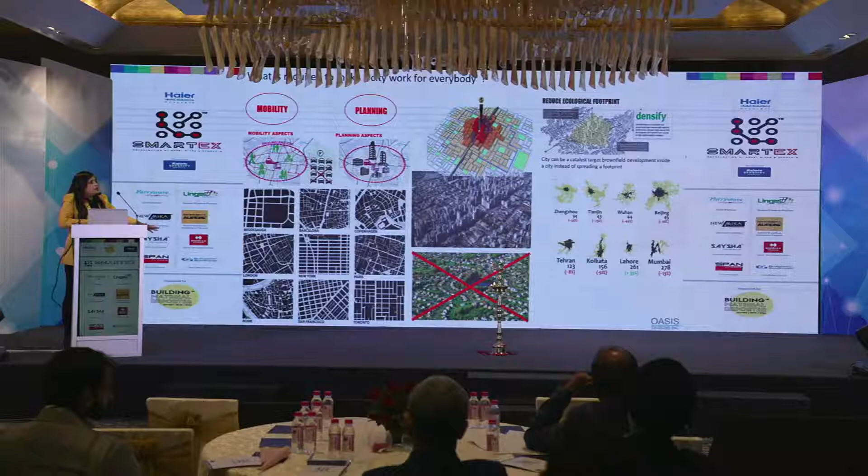Now typically, the really successful cities have been growing over a period of time, either horizontally or vertically, but in India, mostly horizontally, and not even optimizing for transit. Rather, if there is one magnetic city, then everything just follows its footprint.

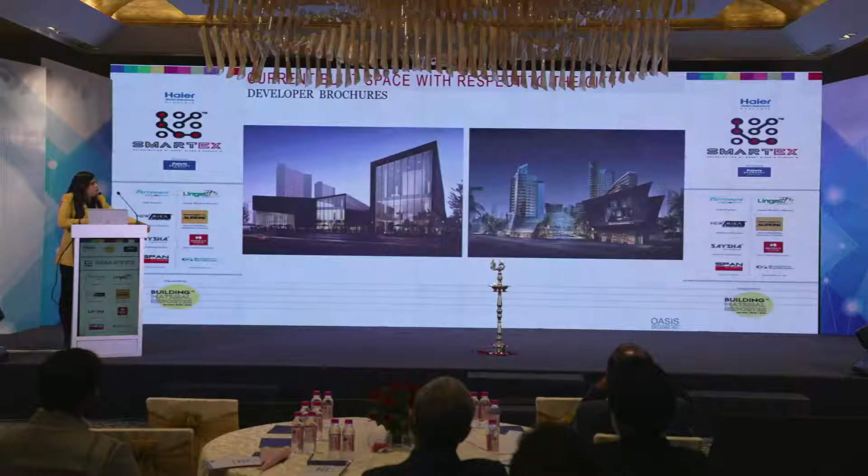Now, if we look at where architecture happens, the developer segment, and where the actual buildings come in, there are beautiful brochures printed, but we don't see any people or whatever is outside. These beautiful buildings have not really related themselves to the city.

So they are separate entities to the real city that is happening, and the real city is also not relating to transit, of the hub, which is a walkable place, but it's surrounded. So it's really sad that we are making walkable places, but we are not relating it to the city.

Similarly, for smaller plots also, our bylaws and policies always get guided by certain things, and this is something to be looked at.

Another thing is that we don't understand what is private and what is public. Place happens when we see the city from the lens of parking. This was a picture near the NDMC area, where land is given for parking.

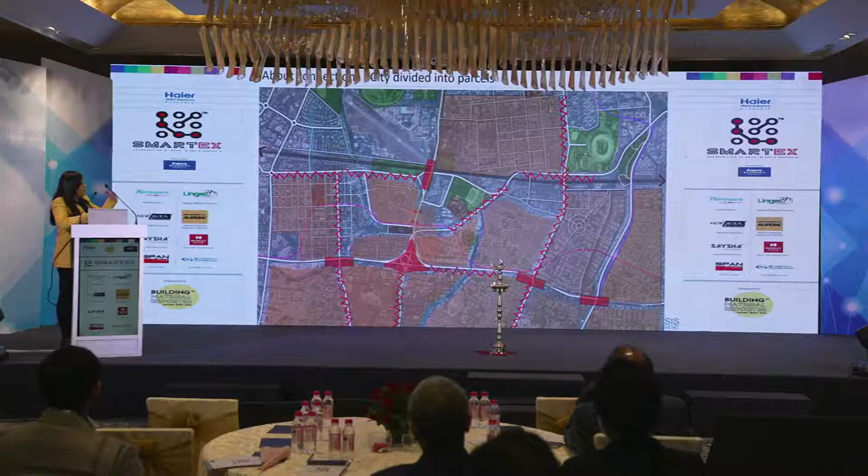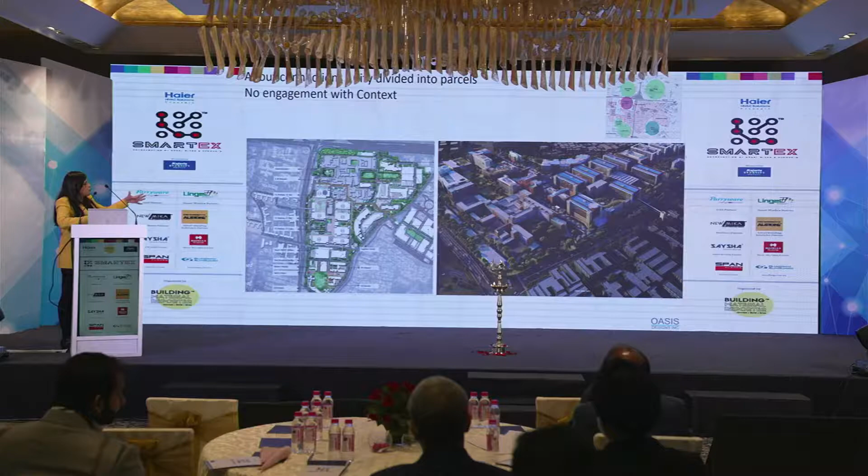In the AIIMS area, there was East Kidwai Nagar, West Kidwai Nagar. I know a lot of co-professionals have designed a lot of areas around it, but I'm just talking about the public realm, what we have done to even a new block that is coming, AIIMS has these roads making it a divider, not a connector.

But it has this service road access, we don't know. Metro station, metro has come in, but what is our response then? Water, how we are managing or not managing it - it is an infrastructure issue.

There's a lot of water which falls out here in the cities. We don't manage it. We put the pollutants inside the ground.

So let us recontextualize. What are cities for the human, and what do humans need? We love nature. That is why we want to be in these kind of places.

Now, the mechanistic worldview that we have had since the last two centuries is also changing, because we are now going from mechanistic science to quantum mechanics, where what we observe can also change.

Action, observing - we can change something. So every ripple or experience isn't just a passive echo. Truth lies in the crossroads of science and philosophy, between thought and reality.

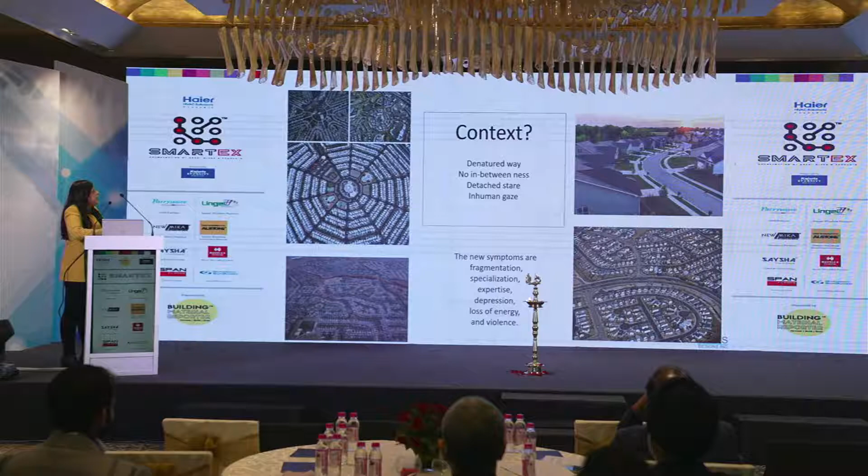The transition happened because industry started happening in the city, and highways came inside our cities. And then after that we could just make any patterns on ground - it didn't matter. The context was whether plots are carbon neutral or whatever.

Again, looking at the positive side and recontextualizing this whole symposium, I think we can look at relationships between all these parameters, and how the built environment and transit can talk to each other.

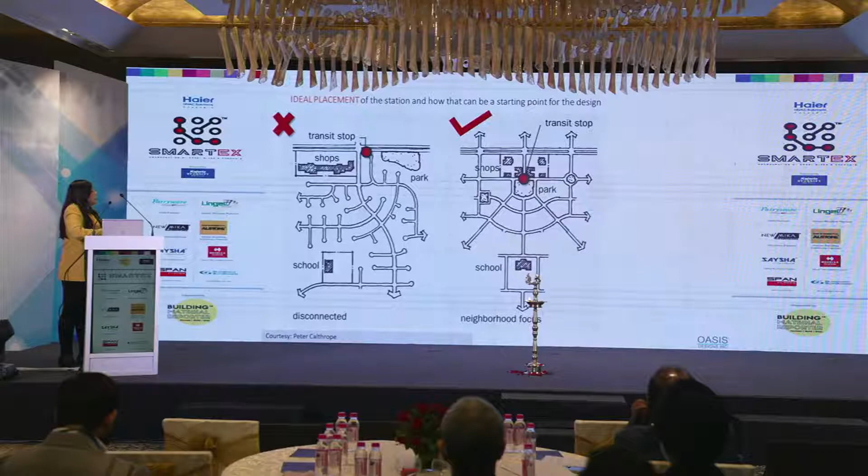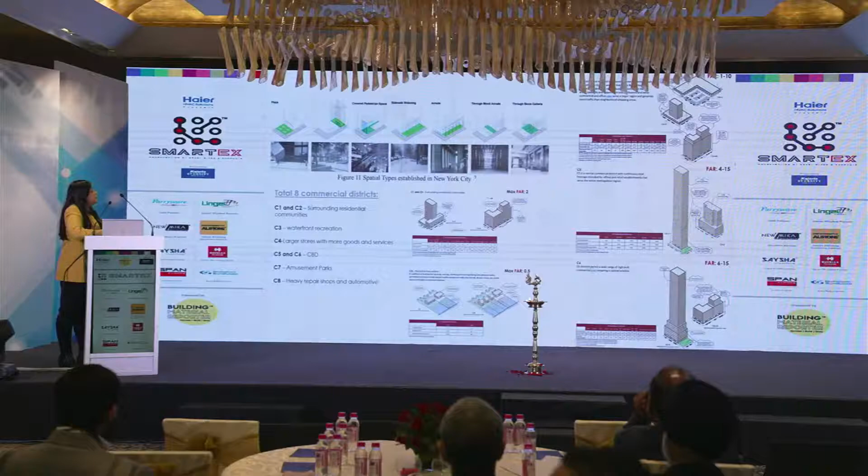We have some examples of the past. New York really works well because of its really nice grid, and it can take in new developments by changing the FARs and everything, and the public and private keep repurposing to make it talk to the city more.

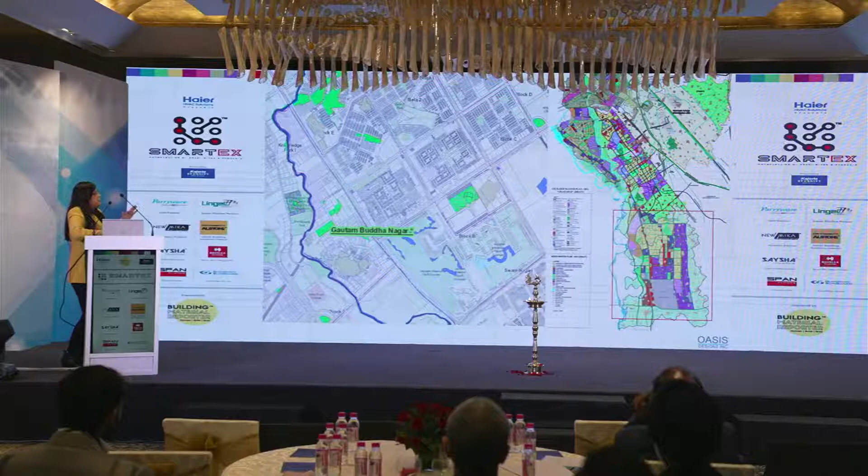But what we are still doing, if you look at the image on the right, we have Noida on the left of the river, then Greater Noida. And now we are making another new city called Jewar, near the Jewar airport. So again, we are spreading further away.

Instead of that, is there a way to actually look at brownfield development within our cities?

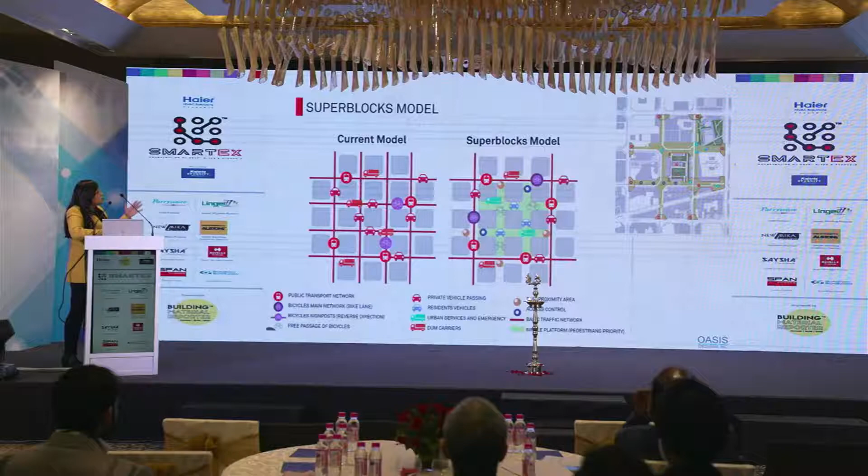Look at livability. Barcelona has a beautiful block system where their blocks were very small. So now they are creating more spaces for the people around, and looking at existing typologies to do the infill developments.

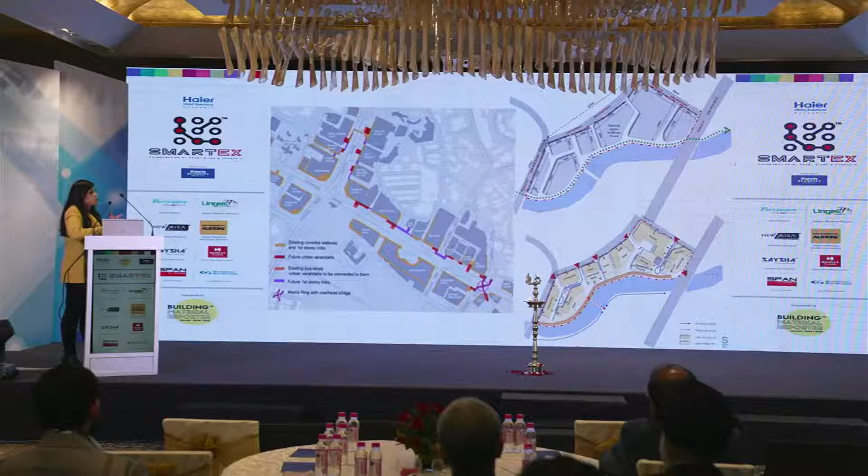This was done in Singapore in the 1960s or 70s, Robertson Quay, where they designed it in such a way that they had policies of how the city will talk to itself. They kept the block sizes small, the typology of the blocks, connections at whatever level. So architecture was really talking to the city, in terms of the verticals also.

Now parking is another thing which we are given as a policy matter, that parking you have to give. Those are basically parking mandates. Parking mandates is something that we can look at not plot-based but area-based. So that is something maybe we can start a discussion on.

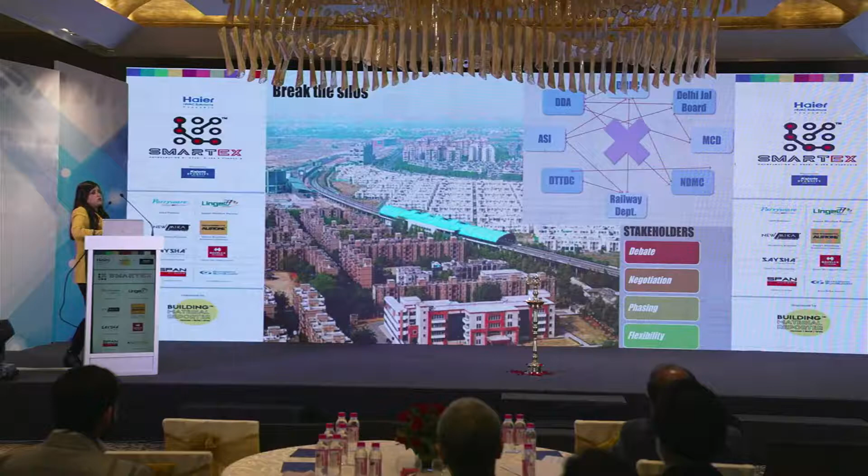So what is the way forward? We need to break the silos of architecture, landscape, and maybe try to integrate ourselves to the city, build to the city buildings. So here we see an opportunity of looking at all of it together, and looking at a field of intersections where we can look at better cities.

I'll read out a small note by Kathleen Raine. She had written about William Blake's fourfold city, Jerusalem. Jerusalem bears the name of the city described in the Holy Book of Revelation, the city coming down from heaven, which is the human task to embody on earth. Jerusalem is the city of imagination, the work of golden builders who have labored to create on earth a city in the likeness of the world within, because the kingdom of heaven is within. The outer world, unilluminated by the imaginative vision, is Babylon, which is a biblical symbol of exile.

Jerusalem is the divine human kingdom. Cities are human kingdoms, the human collective task, never completed, ever building, ever decaying, desolate. It is for every generation to keep that city in repair, to add to it new works for the soul to inhabit, as we inhabit the entire human past. These works embody our deepest knowledge and sublimest vision. But Jerusalem is not to be found in one place or time, but in a universal life created wherever humankind is at work. The human story began in the garden, nature, and ends in the human kingdom, the city.

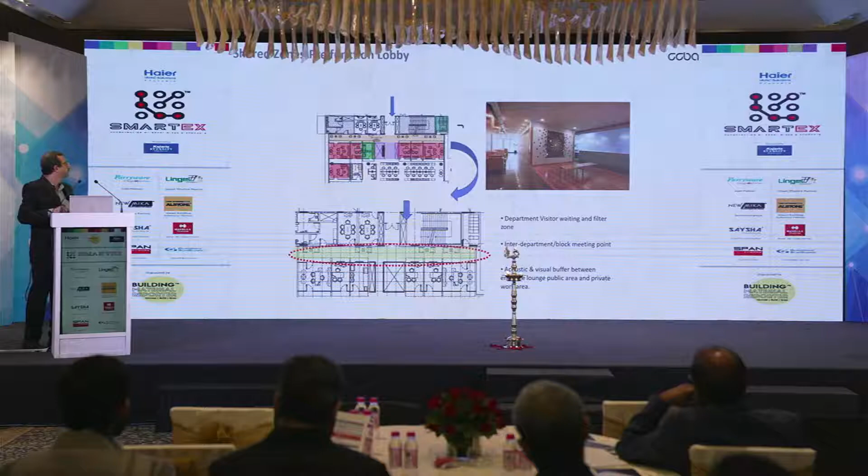While all this was going on in 2006, in 2007 the client invited us for a meeting and said, I need the top level in LEED and I need the top level in TERI. Can it be done? The building was already under construction. But the fundamentals of the core plan were good enough to take it into account.

We have Tanmay here. He was instrumental in getting us the details and rating, because that was, I think, one of the first large projects done at this scale. It was a new experiment for all of us to try and get ratings for a building that was already under construction.

And this is the project that's built. It's still running today, though Suzlon doesn't use it anymore. It's leased out to various tenants. It's still called Suzlon One Earth.

This is all built on a basement. Even the basement is naturally lit and naturally ventilated. We got these skylights and sky courts.

That's the water body in the basement with a deep sump in the center part of the site. The canteen again at the lower level. And all the buildings open out into that.

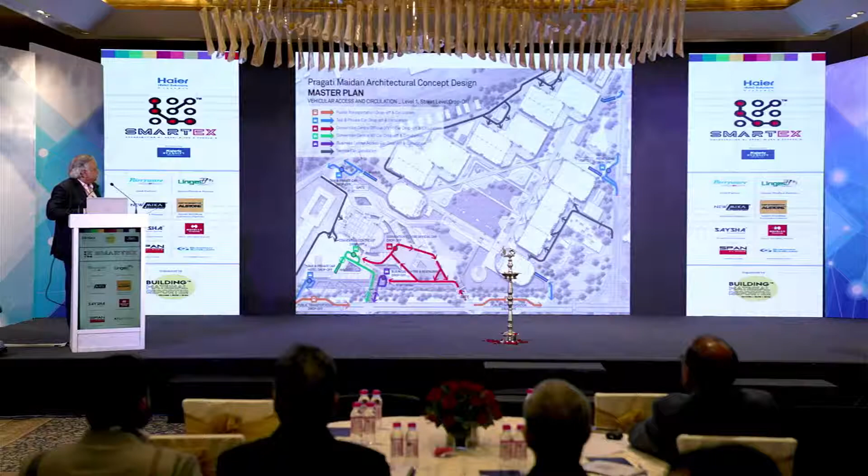The project being designed to hold the convention of G20 had its fair share of security concerns. So the various movement systems of the VVIPs were created with alternate exits in case of a problem. And that's the lower level, which is the basement.

Again, when one got the project, one studied what really this project is all about, and it was actually a traffic mess. The time we got the project, the India International Trade Fair was just around the corner. So we just stood on top of that pedestrian bridge and had a look at how things were building up, and people were picking people up, they were dropping people up, they were standing in the middle of the road, parking in the middle of the road, and it was a complete chaos, right? So we said, if we have to allow people to be dropped off and picked up, you have to do it at a different grade level.

It's not going to happen. With as many number of flyovers, you just do not have the kind of driving discipline that is prevalent all across India. So it is better to sort of separate it. So we came up with this idea of creating a tunnel which would also connect the city. From Purana Qila Road to the Ring Road, we created this artery which went in, literally separating our basements into two parts. We have a connection from under it, becoming a city road.

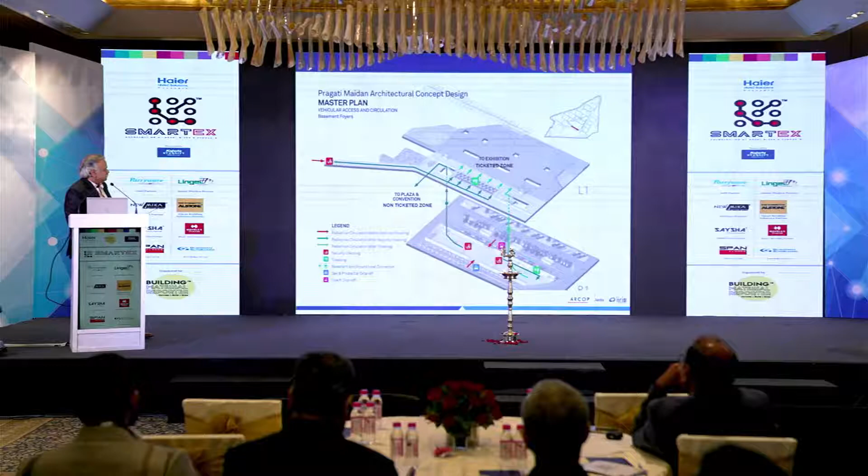And one side you have the security. You go up and land on the non-ticketed side, and the other side you have the security and the ticketing, and this lands you up on the secured ground floor. That actually shows it to you how it was planned. Convention which is non-ticketed.

So in terms of the built form, we came up with several points and their issues, and we were not able to crack it with the client, and everybody wasn't happy. So we looked at all these, and then we came across some images which we looked at.

So we had the building up there, and then the ramps which were emulated from the rivers, sort of flowing down, and then the entire landscape taking a cue from that. And that's what the first image of the project was, which came in.

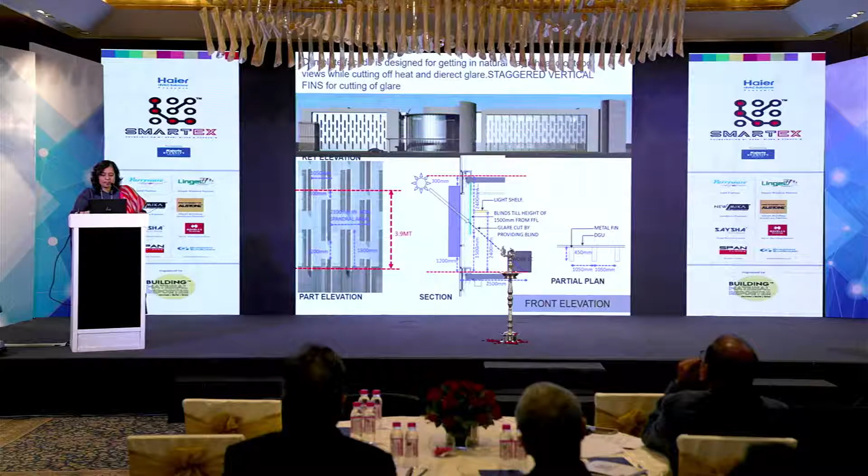And then we did facade studies to ensure that there was complete glare-free light inside. You had a lot of light, but you had no glare. And again, so all those studies were done. We gave breakout spaces around the perimeter.

And that's how the building then looks like. It's heavily shaded by trees, by landscaping, as well as the fence that you see. This image is the Rotunda area, the central area, which is the reception, which has got a jali towards the west side. The western facade is completely shaded, and you do have some glazings, but that's also shaded. All these trees were retained in this building.

That's the atrium, and see the quality of light which comes in, totally glare-free light. And people enjoy sitting there. It's a lovely space to actually be there.

Then this is another campus we did, where the building slopes down, and then there was an irrigation canal which we're using the water for recreation purposes. All the recreation areas are towards the basement, lower ground actually, which opens out into this land zone.

We ensured that, since the wind direction was east-west, we have punches in the building towards east-west, and we ensure that all the public spaces and the places where people could actually sit are nicely shaded. So these were the shadow diagrams that were done and the wind studies that was done.

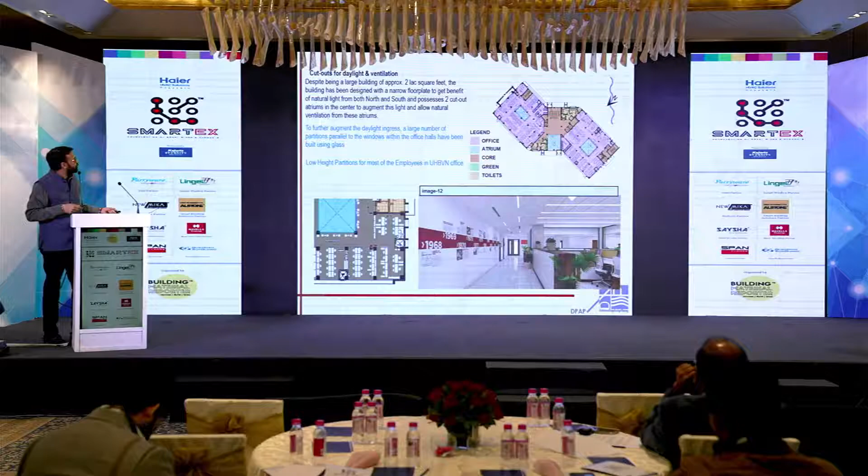This was basically the analysis carried out by Hareda for it to reach the target of Super ECBC, where first the aspect of daylighting was seen and calculated on each floor, and in this particular case we reached the Super ECBC level.

This was a combination of artificial lighting and natural lighting together. In the picture on the left, even though you have a conference room - and normally you create a conference room where you cut out all the natural light because you're creating your own interiors with a screen, but the screens now are not projector screens anymore - we were able to create a set of windows all around with roller blinds where you can really get natural light in and put the roller blinds on when you don't want the natural light.

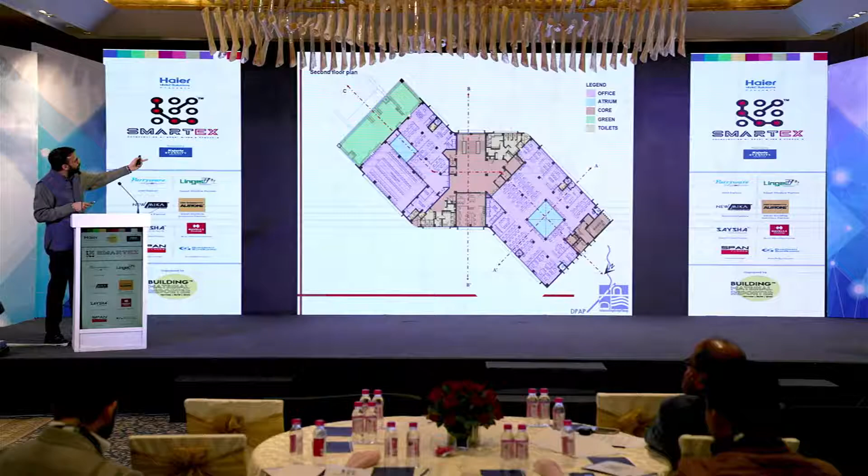So that's really the plan, and that's how it's receding on the eastern side. And there it goes - that's the last floor.

The building itself was highly insulated, again as per Super ECBC standards. What we used was basically an EPS core - a compact thermocol core, or high density thermocol core, with panels, 3 feet by 10 feet or 12 feet high, which get set up very quickly, and then you can shotcrete on them. So basically you get an 8-inch thick wall section which is highly insulated. We created it over the RCC so that the RCC itself would also be protected, because otherwise, when you're trying to insulate a building, the RCC becomes a thermal bridge.

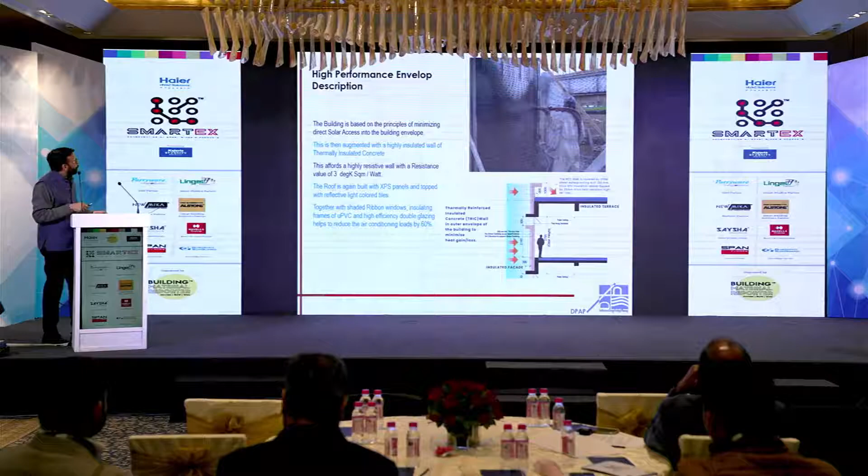Again, more ECBC values - I won't go into details, but basically from the baseline we were reducing 47.4%, and then calculating the carbon savings as well.

There was a high efficiency chiller. We had demand control ventilation, a BMS system, pre-cooling economizers - it is already pre-cooled by the outgoing air. We had operable windows, and because this was during COVID times they were very much concerned about infection control in the interiors. So we also utilized UVGI systems for disinfection of the air going in and coming out. We also used fine filters to make sure the air quality maintained is impeccable.

So this is a video. Can you run the video? It talks about the concept.

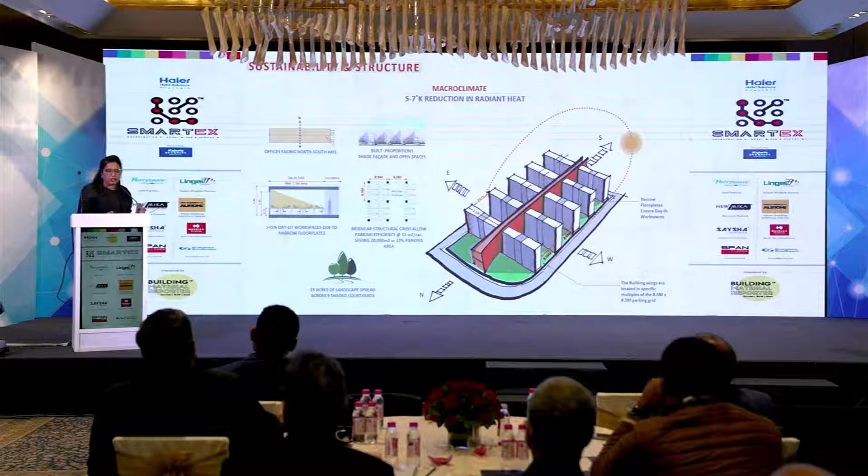You get one client who says, I need this—okay, wait a minute, I'm going to go get it for you, make a few calls, get it from somebody on the road, and go exchange diamonds. So a lot of deals happen outside, with people who are actually not even in the business.

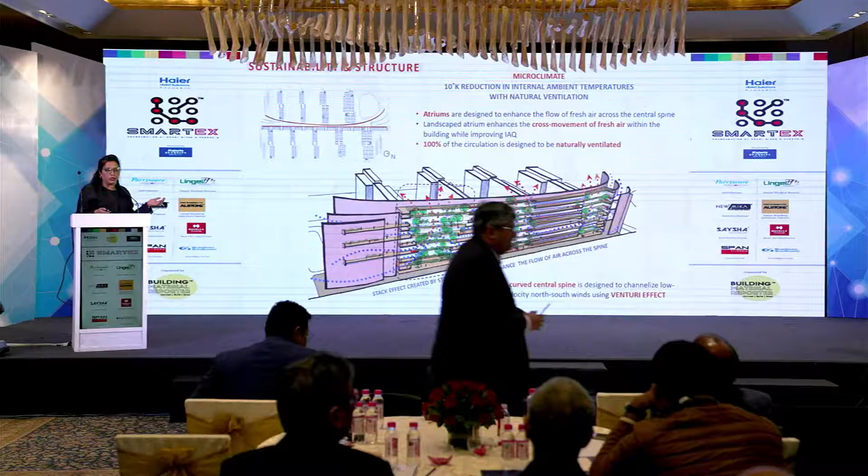So at least half the courtyards are shaded. This urban spine functions as an urban space, with parks, trees, and garden benches where people meet, incorporated so it feels like a real space—and there's no air conditioning, it's naturally ventilated. Using a simple stack effect, and then shaping the space to create a venturi effect to escalate the amount of wind, just to make the space comfortable.

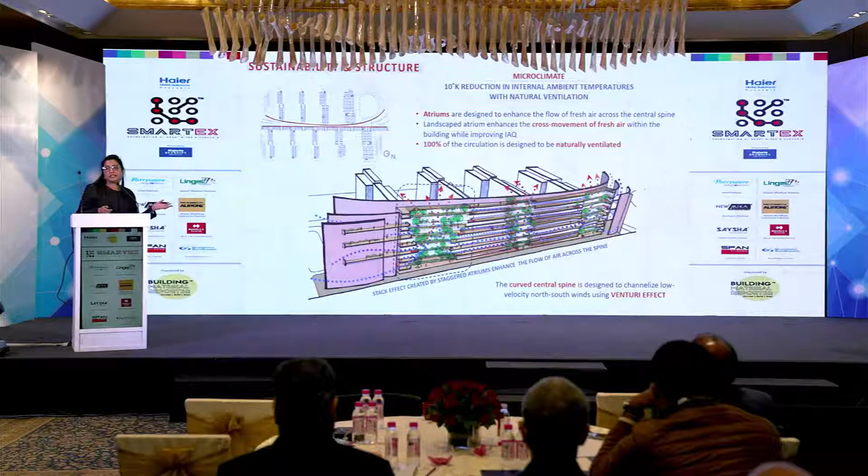So 100% of the circulation, which in a building of this scale is normally about 45%, if I remember correctly, is all naturally ventilated.

These are some sections showing the internal gardens where people hang around, meet, and do trading. The green areas show the courtyards, all on the ground floor level, along with all the amenities. The dabbawalas also come and deposit dabbas there, because food will still come from home—an obvious understanding, knowing Gujaratis.

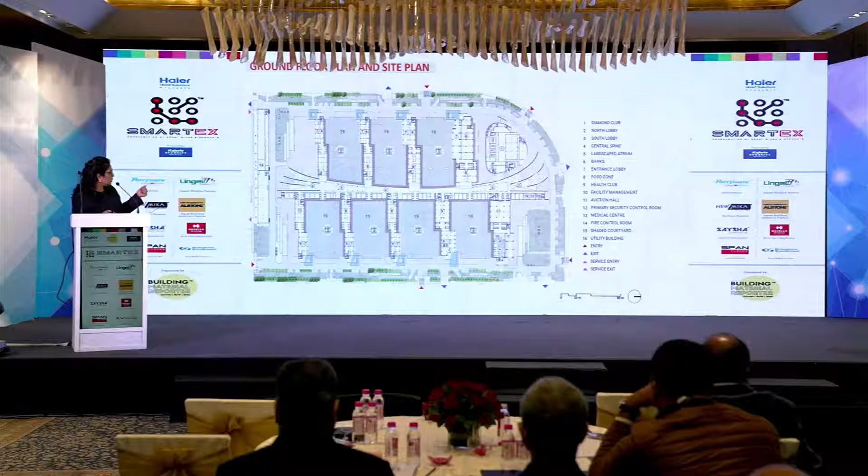There were other amenities, all on the ground floor, so that doing informal business is possible in the courtyards. This is a typical plan, with different sizes of offices varying from approximately 300 square feet to 50,000 square feet. The building sections were designed to get a 45-degree angle of shading for at least 4 courtyards.

The microclimate strategy reduced the ambient temperature by 5 to 7 degrees, and radiant cooling was used to achieve this—so this entire space in the red spine is radiant cooled.

On the ground floor there are medical centers, a travel desk, a creche, as well as their own customs facilities, security, and diamond couriering services—all happening on the ground floor. Then there's basic shopping, not for outside visitors but for their own needs, plus banks, ATMs, and money transfer facilities. There's also 10,000 square meters of food zone with pop-up cafes, al fresco dining, and Dabbawala service, plus other facilities for visiting buyers like a health club, gym, conference and banqueting spaces, and so on. These are pictures of the almost finished building, taken maybe a month or two before completion.

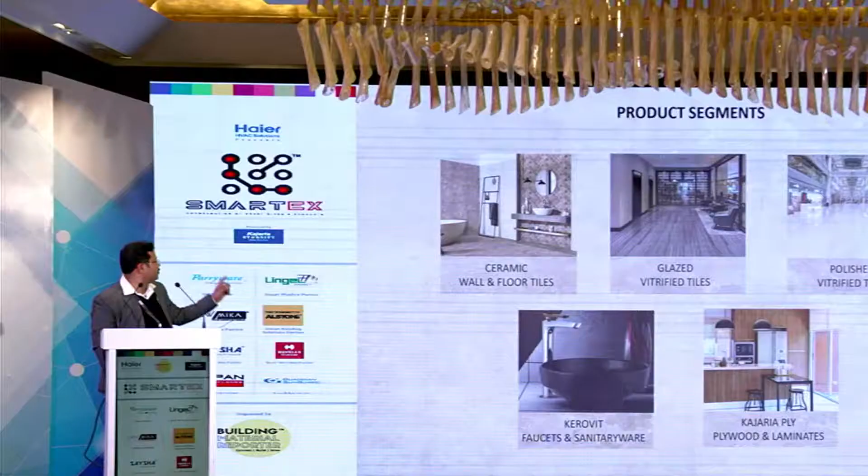Talking about the product range, to serve you, we have got more than 18 sizes, and the product range is more than 3,000 designs.

Our plants are all over India. We have got our plant beginning from Sikandrabad, that's in Uttar Pradesh. We have got two plants in Rajasthan, one in Srikalahasti, Andhra Pradesh, and one in Telangana. There are two plants at Morbi. We have got our sanitaryware and faucet plants also.

Kajaria is the only ceramic tile company which has been awarded as a Super Brand 13 times in a row, an achievement shared by only 60 corporates in India. We are also Asia's most promising brand. There are many certificates like GRIHA and Green Building certificates with us.

Talking about exports, because exports have increased phenomenally, we are exporting to more than 35 countries in the world. For that we have got multiple showrooms. Currently we have showrooms at Dubai, London, and Melbourne. There are many more in the planning, and will be opening in the next financial year.

Now the size of the tile has changed. The customer is demanding bigger sizes. For that we have introduced a new series called the Ultima series, and there are many more sizes available in that particular series.

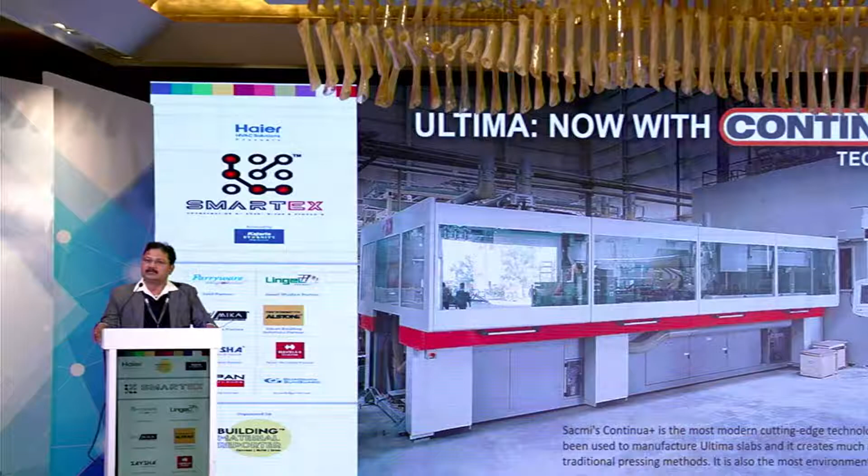Earlier the tiles were manufactured by the pressing technology, we call it. But since the size has increased and we were facing a lot of problems with waviness in the tile, this is a new technology we called Continua Plus technology. Kajaria is the only company which has got its plant in north and south as well for Continua Plus.

In Continua Plus technology, there is a stainless steel pressing system due to which equal pressure is applied on the tile. This reduces the waviness of the tile. The tile becomes more flexible and has better strength also.

There are multiple surfaces in the sizes we discussed. Earlier we used to call it matte, polish, silk matte, marble tech. Now there are many more finishes we have come up with. There is one we call the Beyond series, inspired by superior matte finish quality. Normal matte finish used to have less than 20% light reflection, but with the Beyond series, we claim the light reflection will be less than 5%.

Then there are bold textures. We create a stone kind of texture, cement kind of texture. Earlier it used to be with the pressing machine. Now with the new technology, we are doing it with the help of ink and glaze.